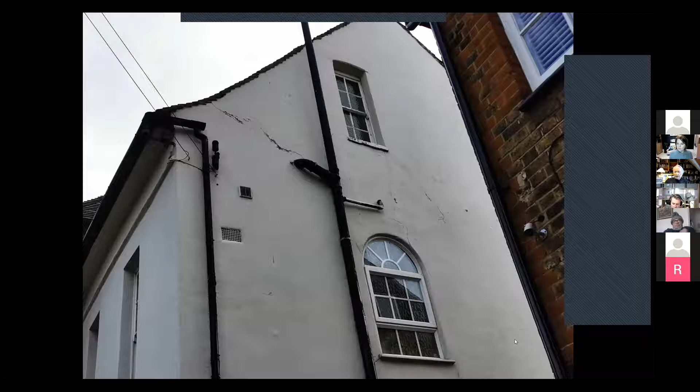But they're single instant failures. So before I start on that, let's go back to last time, because we looked at a building, if you remember last time, having worked our way through to it, and it was this one. Now, it's not often that you get the chance of seeing just how bad it is. There's the roof, that's the detail of what it was. And you can see over on the side here that the roof has slipped, tiles are missing, and so on. Okay, this is as it is now, or was a few weeks ago.

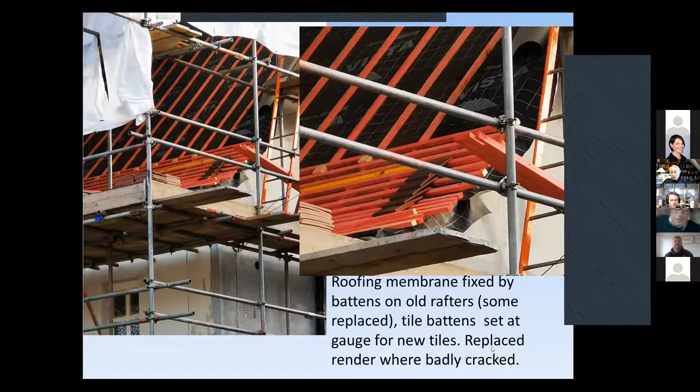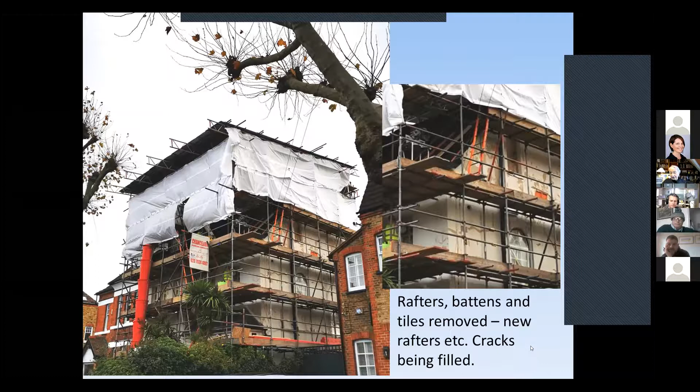So what has happened? When they pulled it to pieces, and now you can see the battens going on top of the felt, or the equivalent of, they've had to replace some of the rafters. They've had to strip the roof totally, and then bring back in those things which are going to be required for a new roof. So you've got a building which over here has got cracks in. They're all being filled. It's now totally re-rendered on that area, and you've got the work that's been done to the roof.

Anyway, back to today. There are two sets of things. Last time we started with the inspection, we worked our way through identifying what was the construction, its condition, from which we came out with what was the likely consequence, what was it likely to be that was wrong with the building. Today, we're going the other way around. What's wrong with the building is very obvious. From that, we've got to work back to the liability, the cause, and so on. So this time, we're going the other way around.

I set up this matrix last time, and we had a look at it. The failure, usually, you're trying to go down to consequences, maybe going up to see what the cause is. But let's just see what's been happening.

This is South Korea, Seoul. It's the biggest of the shopping centres, the Harrods of the area. It is incredibly posh shopping, or was. That is what happened: it collapsed, or half of the building collapsed, to be more precise. And within it is the Sampoong department store. You've got 502 people killed, nearly 1,000 people injured.

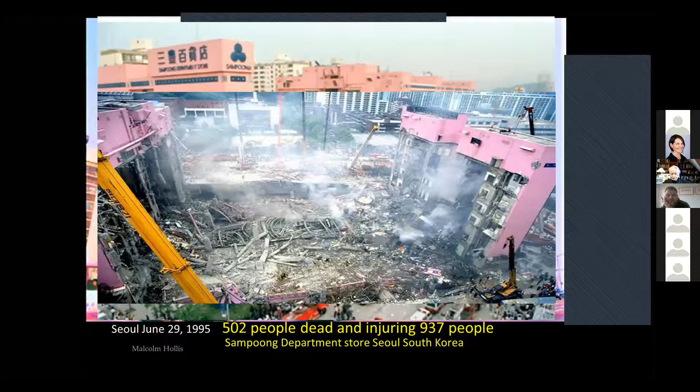Now, things like this don't just happen on a whim. There is a reason. And our job is to try and work back to identify that reason. So here we have some of the information that became available.

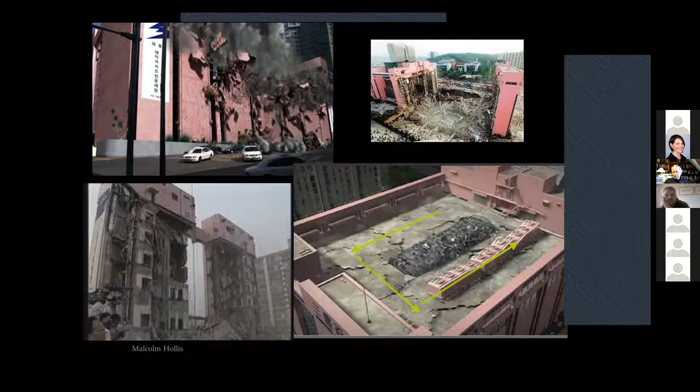Up in the top left, you can see the building disintegrating. Some of that's coming down on the outside, a lot of it drops straight the way through the inside. Down at the bottom right, you've got the air conditioning units on the roof, which have been moved. Each one of those units is 15 tons, so that's 45 tons of equipment on a roof, vibrating. So let's see.

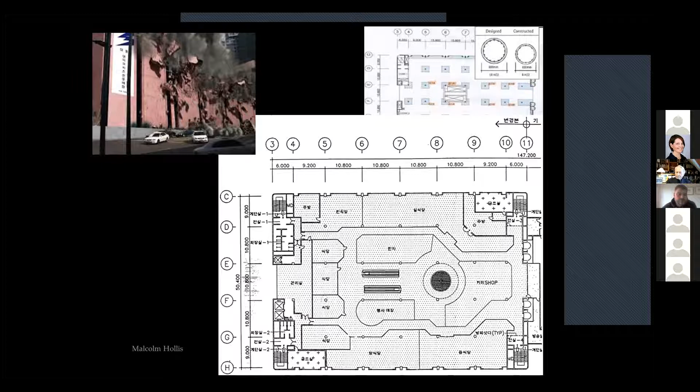In terms of the building as it was put up, the columns were undersized. That's the size they should have been, and what they turned out was that. So in terms of the inside, not only were the columns undersized, but also they took some of them out to get the escalators in. So you've got a building which now we know has been reduced in terms of its strength. It's been reduced in terms of the supports for that strength.

29th June 1995, 25 years ago, the roof gave way, the air conditioning units came through, columns fell, and it took 20 seconds, they reckon, from the beginning to the end. But that is, of course, rubbish. It wasn't 20 seconds, it was 2.5 years into this that you could have stopped anywhere through that, and people's lives would have been saved.

In the investigations, design errors were found. We've talked about some of those. There were many construction faults, poor construction quality, reduction in the cross-section, changes made when they added an extra floor, which was to be a roller skating rink, and was then changed to a restaurant. I had forgotten that eating in that part of the world, you tend to sit on the floor. So the floor became a heated floor so that the diners were not left in too much discomfort. And the heated floor is yet more weight. It was completed in 1989.

Again, you look at the building, you see the changes, you see the errors, you see the alterations. Now, none of those in themselves would have caused the building to fail. These buildings are built with something like a factor of safety of 2.5 times. So if you're reducing the quality of the construction, the strength, you're probably only reducing the ability of that building to withstand by 50%, 60%. It should still stand up. And of course it did.

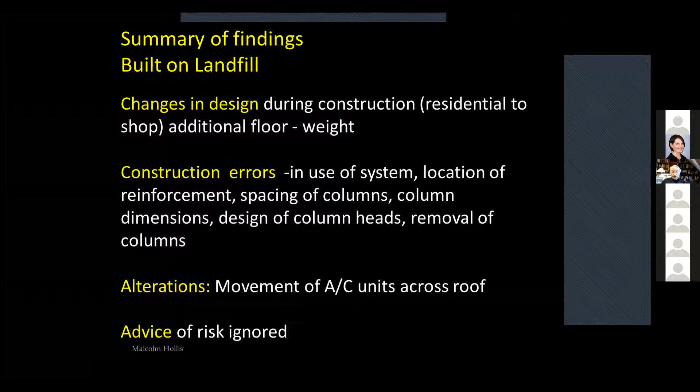So what we need to know is why it began to fail, and in that, what the warnings were. We have a change of use too. It was originally going to be put up as a residential building, but they changed it to a shop. The consequences of that, as I've already mentioned, is the columns being removed to get the escalators in, the columns which are undersized. We've got changes in the design with the weight of an extra floor. We've got also the heated concrete floor and overloading through that by 4 times.

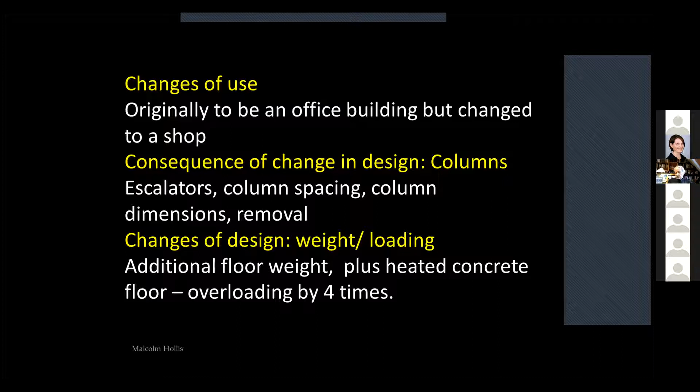Now that again doesn't mean that we've got the problems. What we do have is a flat roof construction, a flat slab construction. This is where your slab is reinforced concrete and it's supported on columns which we've already talked about. But it is vulnerable if you start getting weaknesses and failures to those columns punching through that roof construction. And over on the left, you can see one that didn't completely collapse, but where the top floor has actually dropped through those columns.

In this one, adding to the construction problems we already mentioned and the weaknesses which have been created, the steelwork which was put in had undersized reinforcement bars and not as many as there should have been. There should have been 16 and there are only 8, and their size was severely reduced. So we yet again have something which created problems.

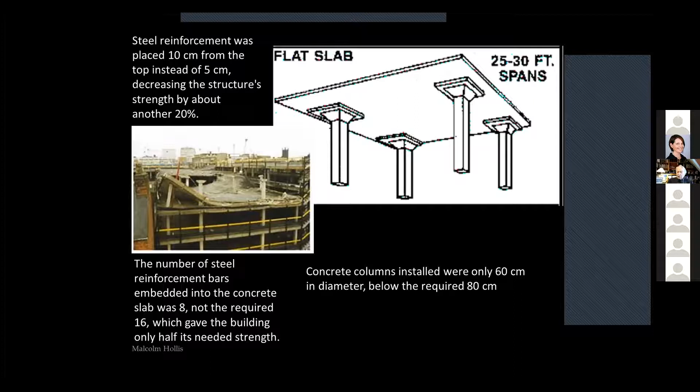And also the reinforcement bars were put in the wrong place. Instead of being something like 5 centimeters from the top, because obviously what you want to do is to stop it doing that, that's why they're there. You've got them lower down, which actually means it'd be pretty good to stop it doing that, but that's not the way the forces were going to act. Again, 20% reduction in the ability of that building to stand.

Oh, minor thing, they'd use seawater to mix the concrete. So this is a building which had a death knell to it anyway, because that would have deteriorated the reinforcement within it, so that it would have deteriorated over a period of time, but not the time from when it was built to when it collapsed. Something triggered it, something set up the problem. That's the factor of safety you start with, and that wasn't totally eliminated.

We've got defective and misuse of the slab construction. We've got the design being changed. We've got added loading without adjustment in the design. We've got 50 tons of air conditioning units in use and being moved. When they moved it, each of those units, they pushed them across the top roof of that part of the building, so you had a rolling weight of 50 tons moved across a roof, which is flat slab construction.

Here's going to be a commonality. The people who owned the building were told by the company building and doing the work that the design was unsafe. The owners of the building reacted to that. They sacked the builders and appointed their own contractors. It's amazing how common this is going to be, that you instantly get a pink slip.

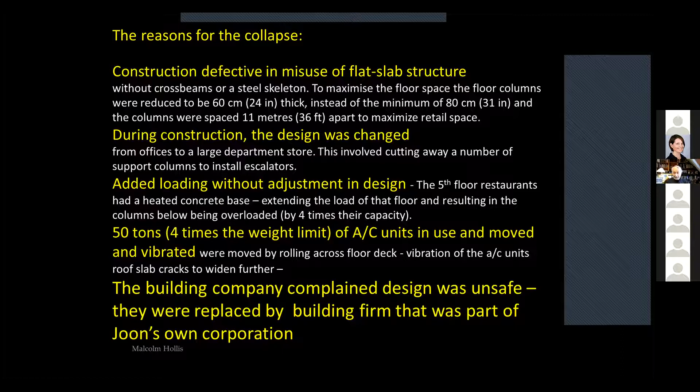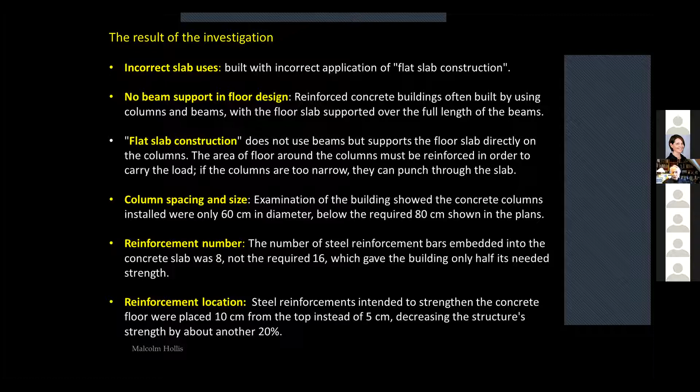The investigation was carried out, and it took 2 and a bit years. This identified the mistakes and the errors that we've talked about, and those are the ones which create the problem. The store opened in 1990. About 40,000 people were visiting each day.

They pinpointed eventually the trigger point. It was discovered 2 years before the collapse that the building's 3 rooftop air conditioning units had been moved. And it's not just the moving of it, it's the fact that they're vibrating. And the vibration is what sets up the beginnings of the cracking and its opening.

During the day of the collapse, it was fairly obvious something wasn't right. That was something which meant that the owners of the building, the owners of the shop, began to get people to move expensive items of merchandise out of the building. They began to get things which could be severely damaged and which were expensive removed—not their staff, not the people within the building. They didn't shut it, they didn't close it down.

But what they did do is they turned off the air conditioning. Now, in June in Seoul, it gets what I suppose I would regard as warm, and the temperature inside got to over 40 degrees centigrade, pretty close to over 100 degrees Fahrenheit. But they left the store open.

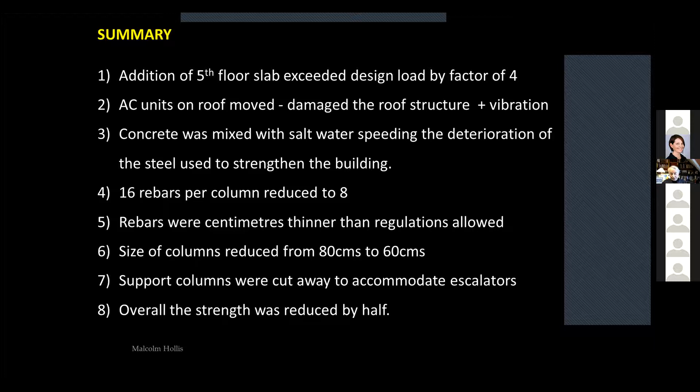The various people involved were charged with human ignorance, criminal negligence, and greed. They were found guilty. Lee Joon, who owned the building, got 10.5 years in prison. His son, who was the chief executive officer, got 7 years.

But buildings like this don't get up unless somebody has faked the details. Somebody has accepted something where they should have said, nope, this is not a good enough quality, this is not a good enough design. And one of the city officials, who was the chief administrator for the area, was sentenced to 3 years in jail for bribery.

He became sucked into the concealment of what was to be a major series of errors. The former chief in the area was found guilty of accepting a bribe of, well, it's about £10,000. He got 10 years—that's £1,000 a year.

So you're left here with the end product of fake information, warnings which have not been taken into account. You've got weak construction. You've got a building which collapsed because of the vibrations that were set up within it.

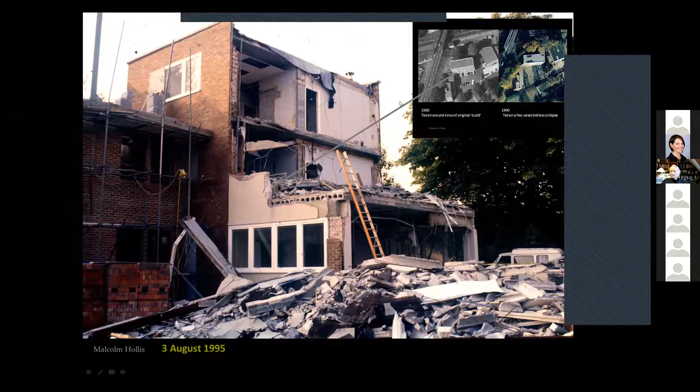It's missing here because it's been removed. It's there, but not there. You've got a brick pier with an external face to it, and the external face isn't tied into the inner. So whatever the dimensions of that column are going to be, they're not going to be the dimensions which are doing the job. And that is there, the aerial photograph, you can just about see.

Going in a bit closer, you can see how the windows have been ripped off. Sitting in a pier here, which is 1.5 bricks wide. Now I'm going to use the old dimensions, that's 13.5 inches. Those should have been 18. In other words, the outer face should have been doing a job. It isn't. So we've got a building which is under strength.

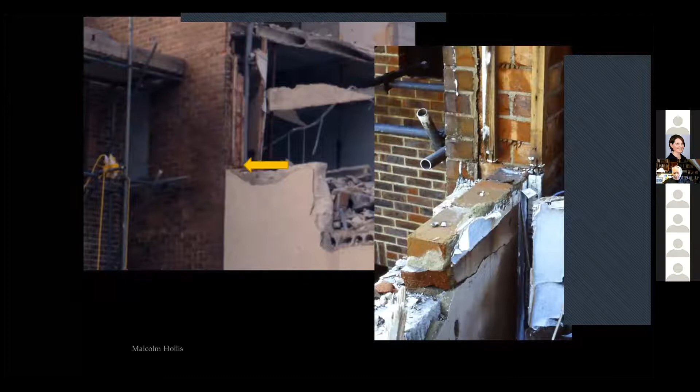We've also got some steelwork sitting in there, which, looking at the construction around it, doesn't leave you very confident. The rainwater downpipe at that location as well. But that doesn't look like neat, tidy brickwork to me. It looks like a cobble. Here's the remains of one of the concrete planks going right the way across, sitting on the steel, as you would expect.

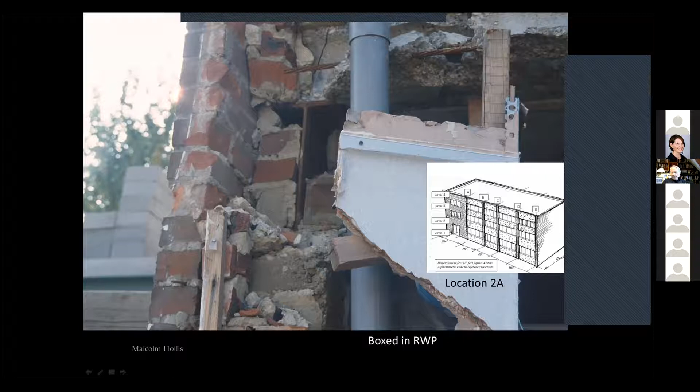So, using one of my sketches here, I had set up a matrix at the time I was first there, labeling the floors in numbers and the columns as letters, so that I could indicate or pinpoint where certain things were.

Here, as you can see in greater detail, how the outside of the pier has just peeled off. Detail here, it's a steel beam, I'll get you closer. There's the steel beam just about visible at the bottom. And I also checked whether these were vertical, how much they're out of alignment. They seem pretty good. Up at the top there, you can see that the bubble on that spirit level is pretty well in the middle.

So as you're wandering around now, you're collecting information, you're looking, you're trying to record as much as you can, because it's the first opportunity that anybody has had to go into the building and do this sort of work. I didn't go up to the second floor because all of that area, which is the kitchen, toilets, and so on, was too dangerous. The first floor wasn't exactly one I was happy about, but it was in a better condition than the top floor.

And then there's this. What do you see? Why is that dirty at that point? Let's go a bit closer. You can see the surface marks there. What's been going on in sufficient time for that to happen? In other words, that's not since the building fell down. There you're looking at something that has been probably days, weeks, months, certainly weeks. And there's obviously a staining.

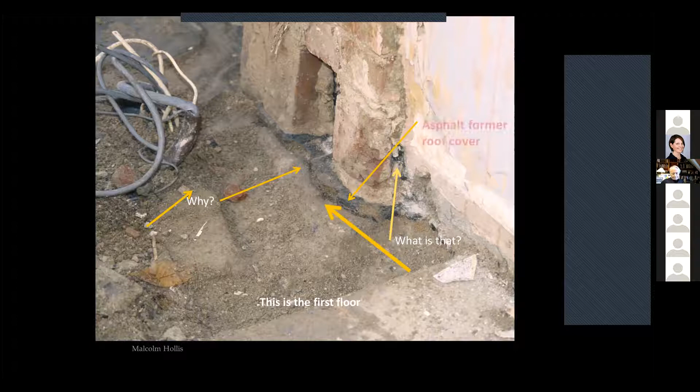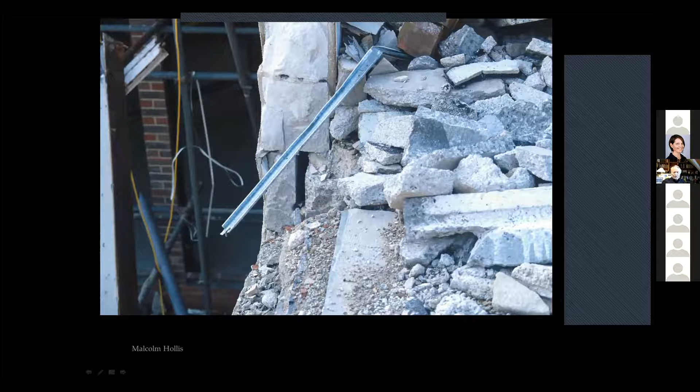And then you look at the material which is there, you're looking at the quality of the bricks, you're looking at how these relationships work down here, the remains of the concrete planks. And oddly enough, you get damp-proof courses where you don't expect them to be. You get down here holes right the way through the piers, ones for the heating system to go through, undermining or reducing the quality.

You measure the piers. That one you can see is 13.5 by 13.5, not 18 by 18 as it should have been. And again, the brickwork, you usually expect piers to be neatly tied together with the bricks being laid in a way that you can see they're forming a solid mass. These were just thrown in.

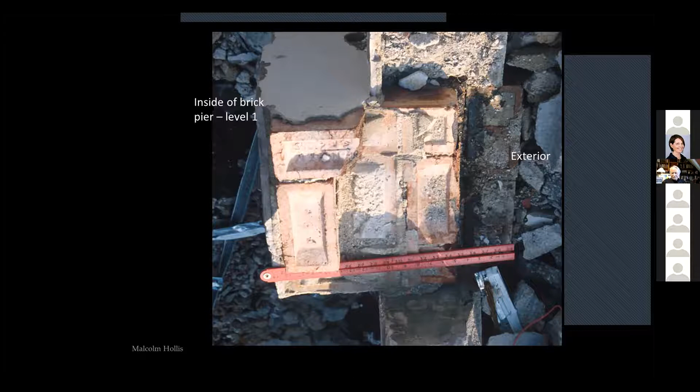More pipes running through. And this time, what have we got? Just about 9 inches by 13.5. And that is where the outside leaf was put on top of it, but not fixed.

So going back to one of my doodles, you've got bricks in a higgledy-piggledy way, not forming a uniform whole, and that is an example of a pier that is there within the building.

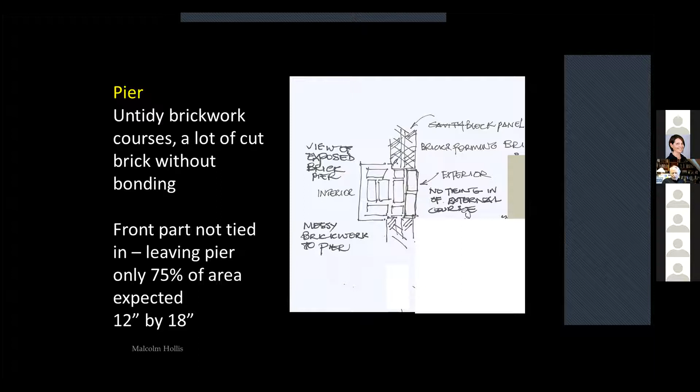The front part not tied in, the untidy brickwork - you have a building that you regard as being weak. But then you're looking at this from it being exposed. You're not looking at this on the basis of what you'd see before anything fell down.

So each bay has got brickwork, has got the 3 levels. We've got the concrete beams that go across these planks. We've got infill panels at each level, which are block work, which has been rendered.

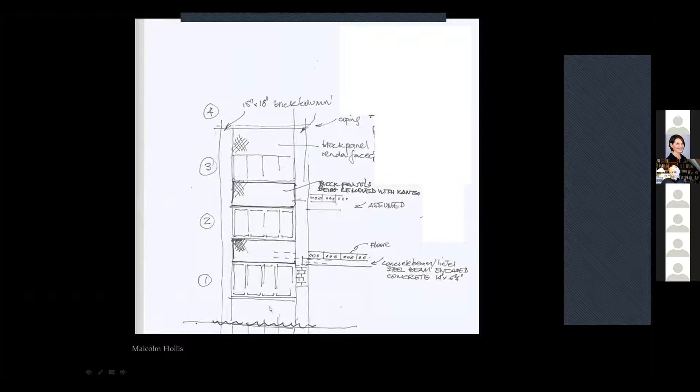All of those become relevant as we go further on. But all we're doing at this stage is trying desperately to collect information because it won't be there in the long term. Somebody's going to go in there and start tidying up, and at that stage, all of this is going to be missing.

So the whole of what I was doing was making sure I had drawings, sketches, notes, measurements, just so that I had a record. From that, I wanted to get some idea of how it was built and, putting it bluntly, what it looked like.

And we've got choices. We start off with a static analysis. Let's review the evidence that comes from drawings, reports, witness statements, and aerial photographs. Let's then, from that, recommend the deconstruction of the remains so we can test materials, look at how it is actually constructed. And then we want to try and verify what we believe is our theories.

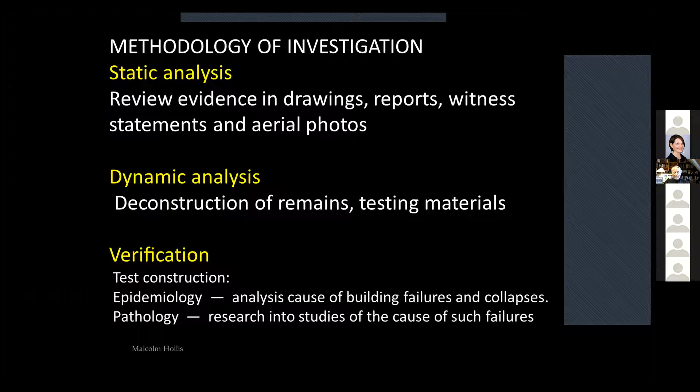And usually we're using pathology or epidemiology. And now analysing the cause of the building failures and collapses, we're researching into the studies of the cause of such failures. And we've particularly come across this again because these 3 subjects are all interrelated.

Now, preliminary inspection identifies what has been disturbed, where the bodies probably were, but we keep an open mind. When it comes to the investigation stage, we're going to try and recreate the appearance and construction of the building prior to the collapse, so we know how much it's been changed.

We have got information that will come from aerial photographs, the press images we've already seen, but we're going to look at the drawings that were available at the time of the collapse. We want witness statements, the people who were there at the time. We want to know what they saw, what they were doing, what was happening.

The pathology reports, or the pathologist's report, will report on the bodies, so that one can work out where people were and a lot of other things which we'll come to. And again, trying to establish what the construction was and any issues of stability.

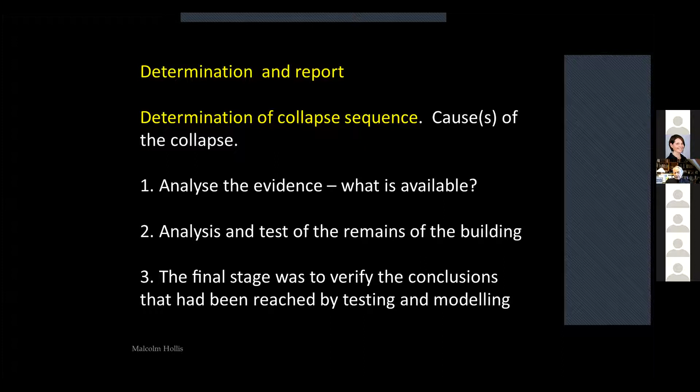I've got to report to clients. I can do an interim report, I can come up with theories, but what we need is more information and evidence. So we're going to analyse that, we're going to look at the remains of the building, and the final stage will be to try and verify our conclusions.

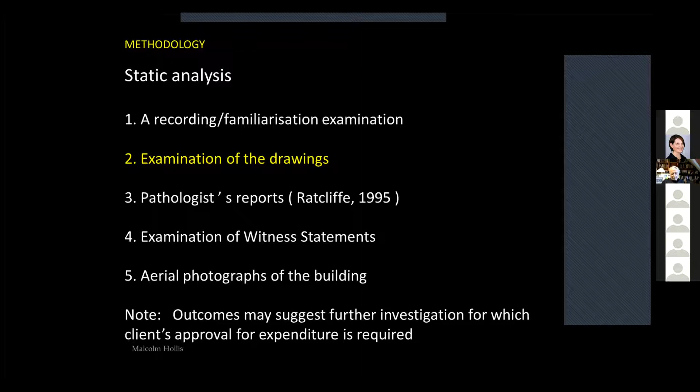So we've done a first look, and we've recorded as much as we can. Now it's the examination of the drawings, from which we hope we can answer the questions: what was the building like before the collapse?

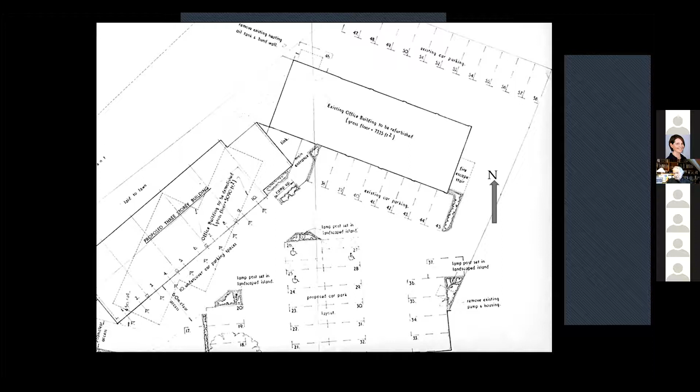So let's look at what we've got further.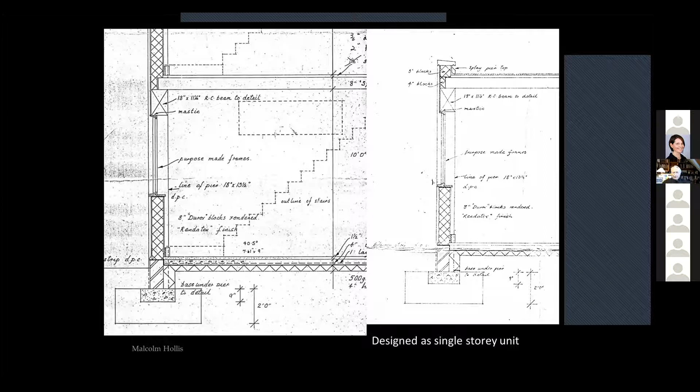Here's the floor plan. Down the left-hand side, these are simply the notes on the drawing because they're pretty difficult to read. Forget what's down on the side of the plan and look at what's written there. What we've got is the dimensions of the blockwork, brickwork, and the cavity in the construction, and the dimensions of the piers that should be there.

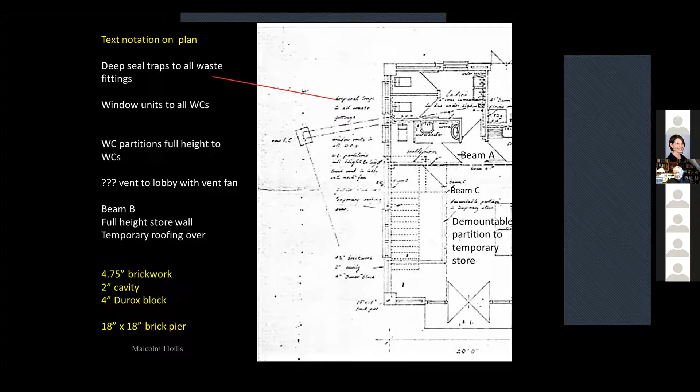We've got floor plans drawn at a different time, totally different hand, different lettering, different clarity. Here we see something relevant: a foundation marked out, and here a steel column, a steel pier. So we're looking at somebody having identified that this building is not strong enough as it sits there. It needs strengthening by the addition of additional steel columns.

To fit those in, they're going to have to chase their way through the existing construction so that you can get those columns in, and down at the bottom you need some space so that you can dig out the foundations. Somebody has decided the building is not strong enough as it was, prior to the building work. Crudely, I've sketched out there what is taking place. Probably, and almost certainly, I've made the holes in the individual panels too big.

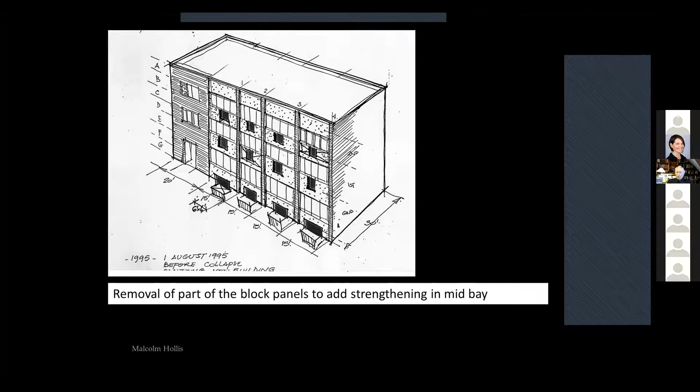That had been cut away before the building collapsed, as had some of the others. So we've got that marking that we were looking at before, indicating that this was probably the size of the chase, directly above the middle transom of the window. Concrete planks that we've seen before - we're looking at that being where the column was going to go up.

So we've got non-reliability in the drawings. One lot's showing something, another lot showing something else. They're showing the building has been altered after part of it was completed. So we now know, if these are right, that we're looking at extra loading being placed upon the building. We're talking about the changes from the final build.

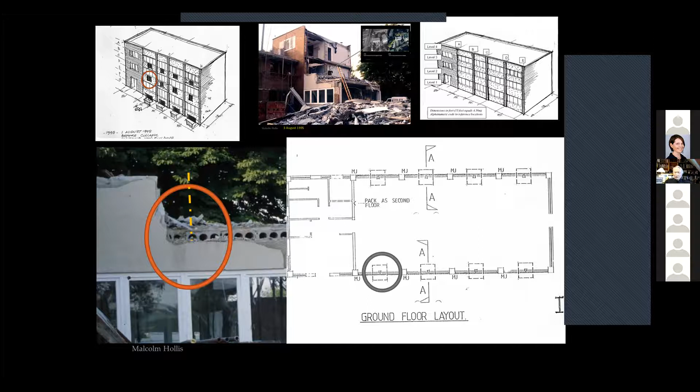In those changes, there are some other things. If we go back to what was supposed to be there, this should be a reinforced concrete ring, going around the building, acting as lintels right the way around and tying it all together nice and neatly. Whereas what we saw when we started looking in more detail, they have done individual steel lintels, I suppose, as beams across each opening, untied together, so that there is no continuity.

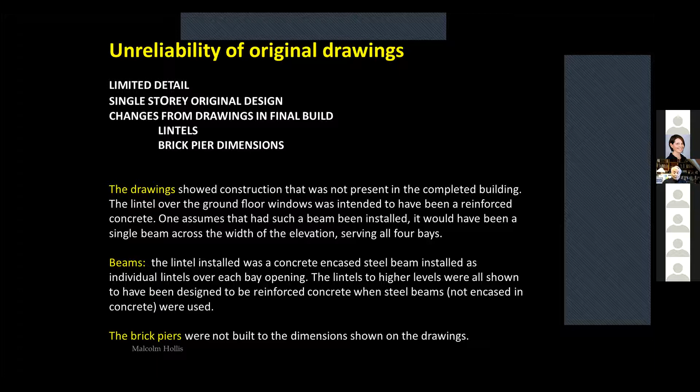If one of those piers begins to distort or fail, it's going to take with it the lintel, as opposed to what would normally happen. If you've got the ring beam, it could move away and not severely damage the construction that was there, because there'd be that extra support that would come from it.

So we've got the examination of the drawings, and we've got some wobbles in our mind as we think about it. Now let's look at Dr. Ratcliffe's pathologist's report. He looks at more things than you'd expect. Not only is he looking at the bodies and what caused the problems and so on, he also notes things like what they were wearing - no hard hats, no protective clothing or protective footwear.

He also looks at the alcohol levels. This collapse took place just after lunch, and the blood alcohol levels are obviously relevant because somebody who's working with heavy equipment and they were cutting away those brick panels, block panels, to get those new steel vertical columns in - well, if you've had a drink at lunchtime, how accurate is your use of a Kango? Mine would be pretty crap even without the alcohol. Might be better with it.

But what you've got is a percussion instrument which is doing a vibration job, and it's cutting into the building, and you need it to be done accurately. Careless use of that could have set up the problems. He also listed the names and occupations of those who died: the site manager, contractor, carpenter, and labourer.

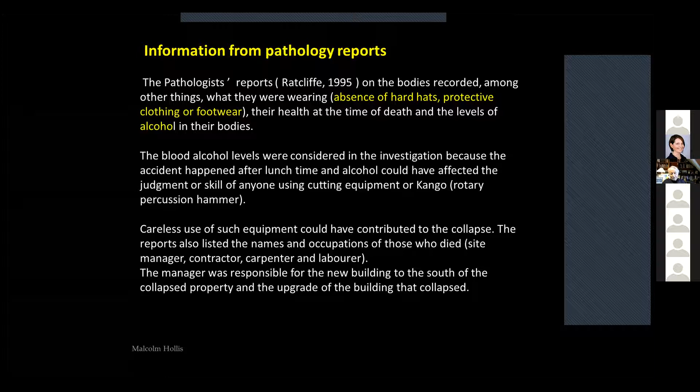So the pathologist report has told us something. It's going to help us know where the bodies were. Now let's look at the witness statements. This is where we're going to try and get some information from those who were there on the site. There are about 23 people working on the site, so there's 19 people who should be able to tell you what happened.

And this is what you get: the suggestion that the building was distorted before the collapse took place. Many of the statements referred to the piers on the front elevation being distorted and leaning out, leading most of the witnesses to conclude that the building had been built out of plumb.

Column C2, which is the one I've pointed to, was kinked in and out and was not straight. 5 inches in and out, or 2 or 3 inches one side, 1.5 inches another, irregular in another. Quite a bit of distortion is another piece of evidence. The building is all over the place, 2 to 5, 2.5 to 3 inches out of plumb.

Building not plumb, cracks inside at bottom of piers. Piers C2 undulating towards building. The examination of the remainder of the building, however, did not support all of these statements.

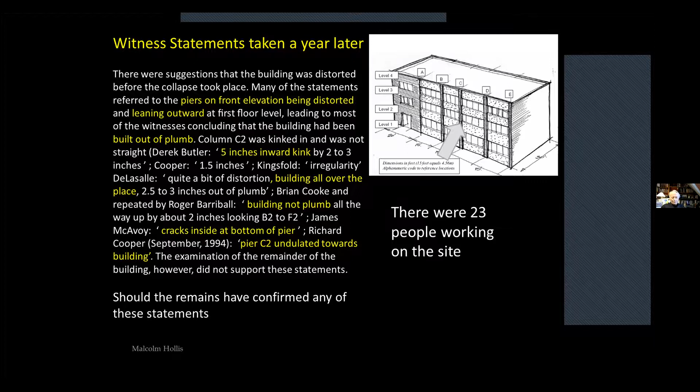And in fact, now there is actually guidance to that very effect. The information about the work in progress at the time of the collapse is relevant. Panels were being cut on the first floor near the middle - well, in fact, they were being cut roughly where I've put the arrows in. Based on the information, it was between A2 and B2, which is actually further over this way, or C and D.

There's reference to the use of a Kango hammer to remove the blockwork underneath the windows to put the new steel columns in. But it was silent before the building collapsed. Whatever they'd done, whatever they'd started off, did not cause the building to fall down. What it did, well, is expose the most likely causes.

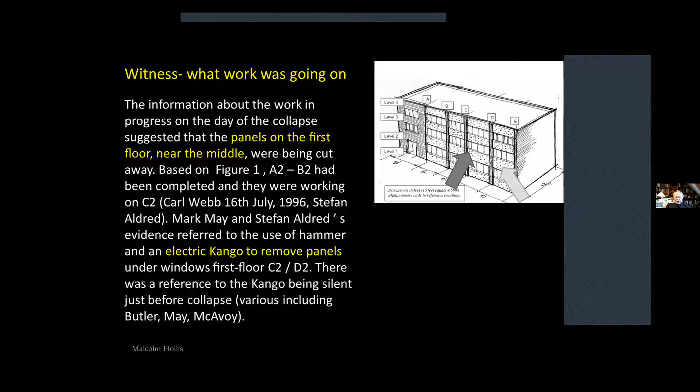Where were the bodies? Taken from the pathologist's report, witness statements, and all of the others, the bodies - well, 3 of them - are where those arrows show. One body was right over here, nothing to do with what was going on here. But 3 of them were right on top of each other.

The site manager's body was found at the bottom of C2D2. One of the others was nearer the center, and they were recovered from the ground floor. Part of one of them was on the first floor.

Going back to evaluation of witness statements, we've already decided that they're not really independent. The nature of them suggests that they corroborated. And the guidance noted in taking witness statements records that witness statements should normally be taken as soon as possible to ensure that the events are still fresh in the mind of the witness, and the evidence is recorded before the witness has the opportunity to discuss their evidence with others. That's from the guidance that is issued and is common and applied in all cases.

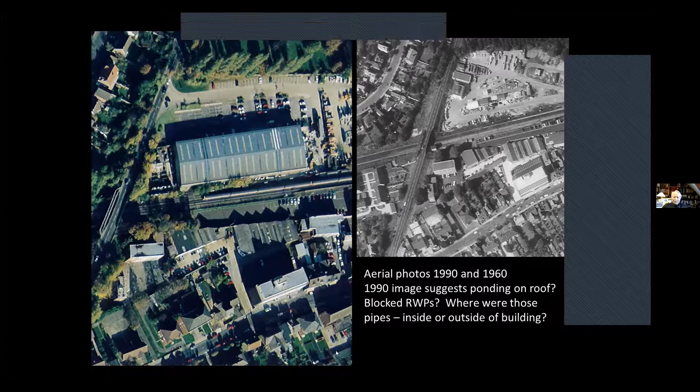This right-hand one, the black and white, was taken about 1960. The one on the left, let's get a bit closer. The one now on the right, 1990, we can see that something hasn't been maintained very well. We've got ponding on the roof where rainwater downpipes have probably got blocked. We've got something which has got an additional line of issues, which we've got to think about.

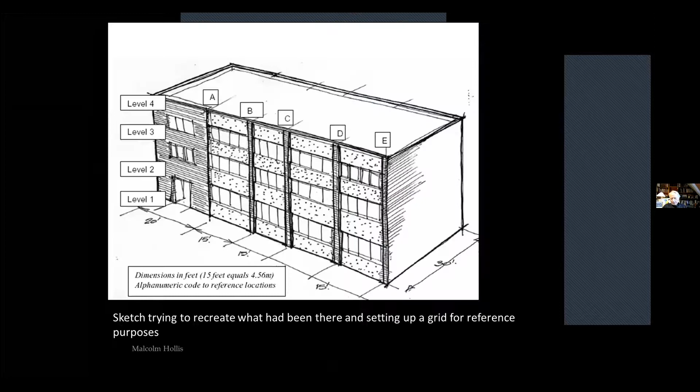And then you come down to what it is that you're going to recommend. We've so far done the first part: an initial inspection. We've done an inspection of the original construction drawings, aerial photographs, pathologist report, and witness statements. And now we come to the biggie.

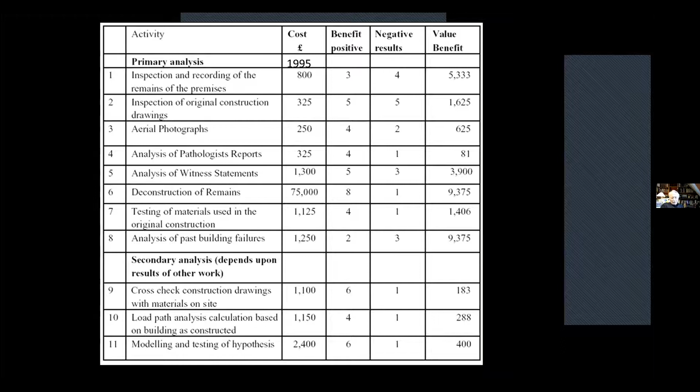And you might want to do an analysis of past building failures of this type, except in this country this is a rarity. Then we will work on other things, which is modeling and so on, to test the hypothesis.

So we come to the deconstruction. We've got the dynamic analysis, we've got verification, and we've got determination of the cause of the collapse, the sequence of the collapse, and the liability.

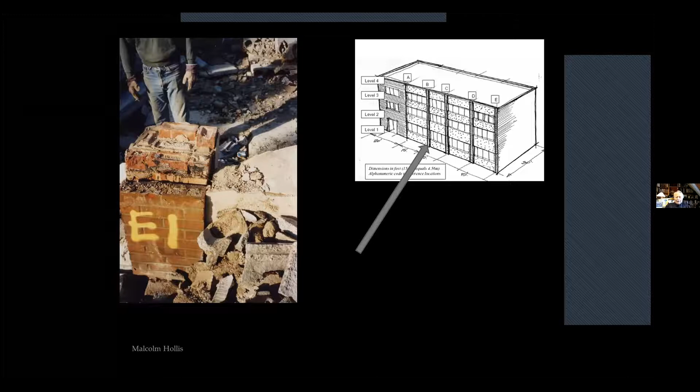So here we've got the piers being marked off. What I labelled originally as A, B, C, D, E have now been slightly changed because the matrix that's been used starts at the very rear corner of the part that didn't fall down. All of the areas begin to be marked off, but you can see that all the debris has now been removed.

And what now becomes unearthed is something like that. The drain's directly under one of those brick piers. So you're looking at something where over in the corner here, you've got a blocked rainwater pipe - how on earth you can put a pier on top of the drain, I don't know, and I probably never will.

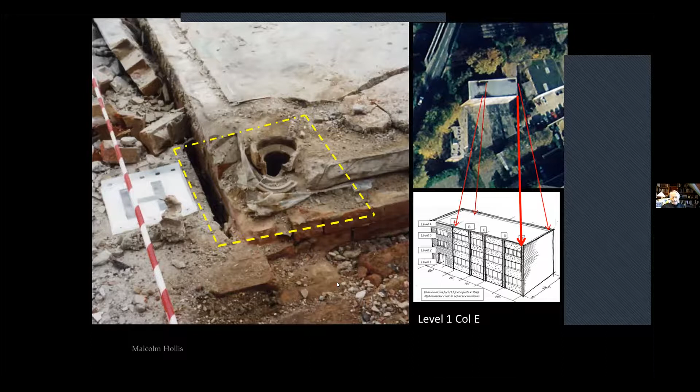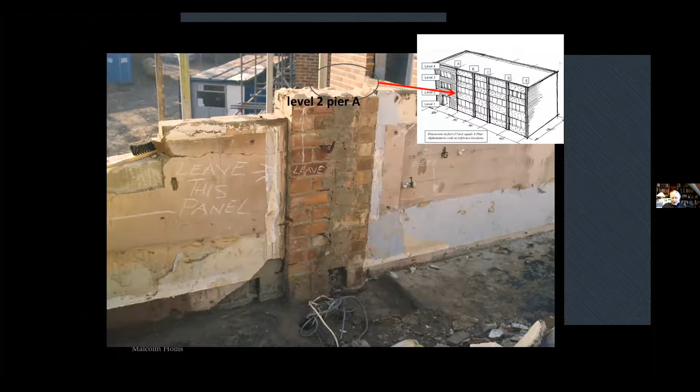And then you look at the deconstruction of the piers. What we've got left, we want to look at and examine. We want to be able to find out what was going on. So we got back to that asphalt where we know this pier has been built on top of the original roof.

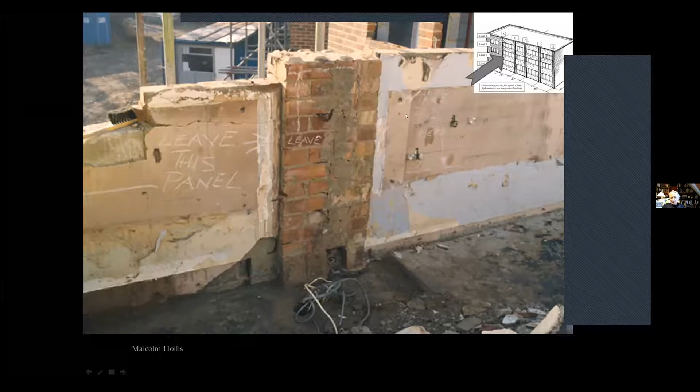So where we are looking is over here - that's where we are at this point. And then you start looking into details. Some of the brickwork gets taken off the outside, and you find a damp-proof course flashing there, laid into the brick courses. That's because that used to be the roof - you wouldn't expect that at each level normally. It is something which goes back to confirm that this part is the fill where on top of that the asphalt lay.

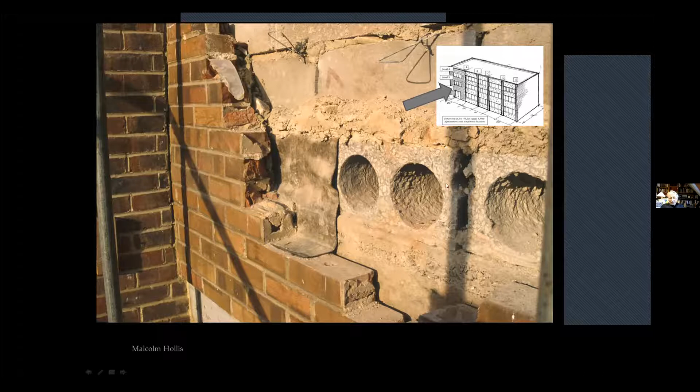The concrete beams, as we've seen before, the planks are all in the place you'd expect them to be. So gradually now, we're going to take block by block out to see what is there.

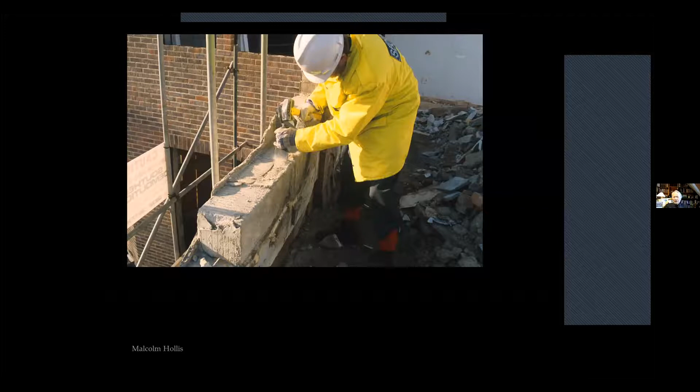That's the detail over in that corner. Brickwork on top of the blockwork there. Here we've got one of the concrete lintels, and that was another one. Separation between the two, so there's no continuity.

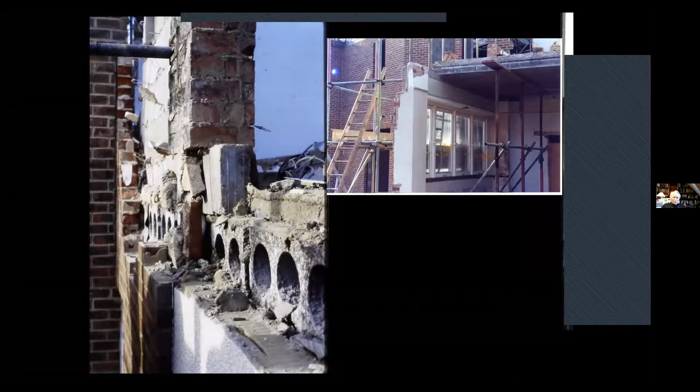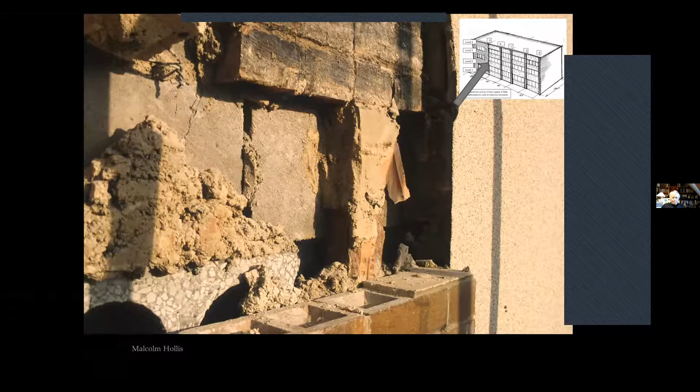And we've got our - hang on, what are we looking at? What is it that's going on here? You've got the pier placed on top of what was the parapet wall and blockwork, and it's balanced - balanced with just that support on the outside, balanced with just those bricks on the inside, and it's sitting on a lightweight concrete block.

So the floors that have been added above for the construction, and the weight of those floors and the weight of the roof, is sitting in that particular place where you've got the brick pier directly on top of a block.

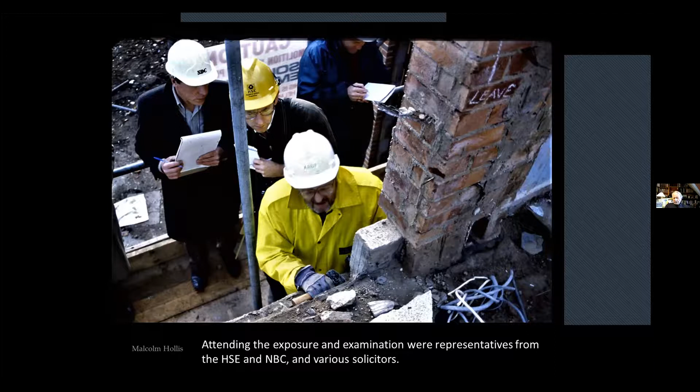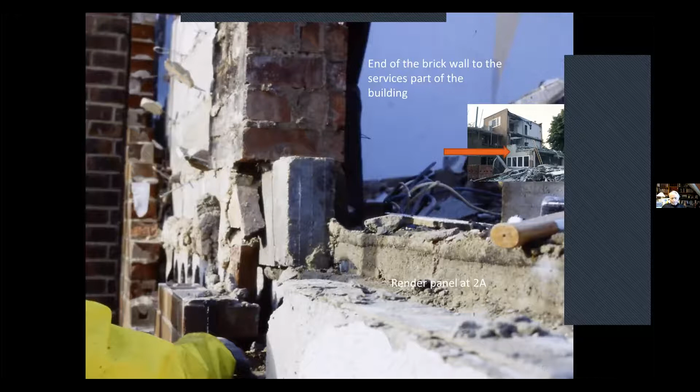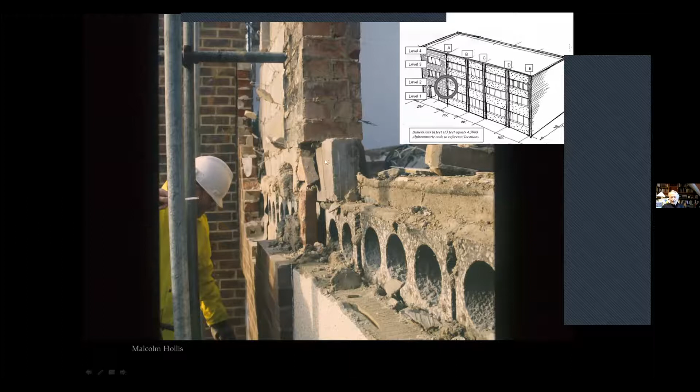It isn't as if these bricks that were propped up were even linked to or tied back onto the surface. They were just filling in a gap rather than adding support.

On the other side of the building, at the back, you've got the same sort of thing going on. That plinth was the original, and you see the asphalt behind there, that was where the roof was dressed up. Parapet with the coping on top, that is what that edge was.

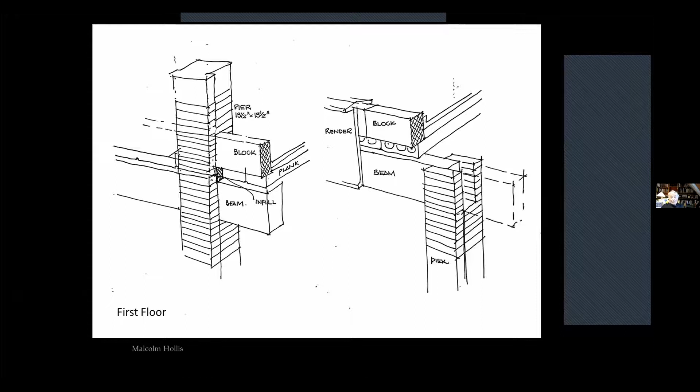My doodles again, my sketches, show you what you're looking at. It looks a lot better in the drawings than it actually was when you're standing on the site and first see this. You think, how on earth can anyone do that?

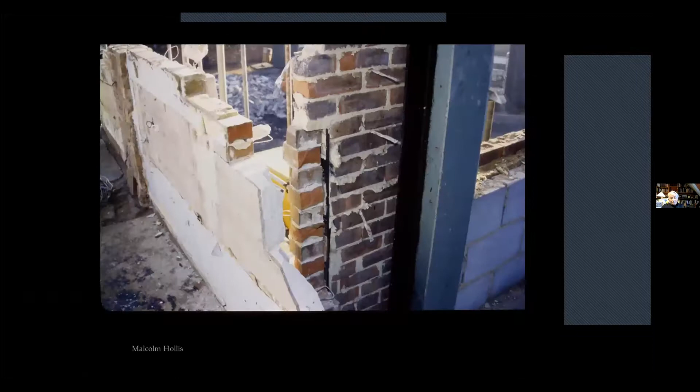But you've got 4 people's deaths on your hands. It was constructed as a single-story building in 1969. It's had 2 floors added, put up before health and safety issues.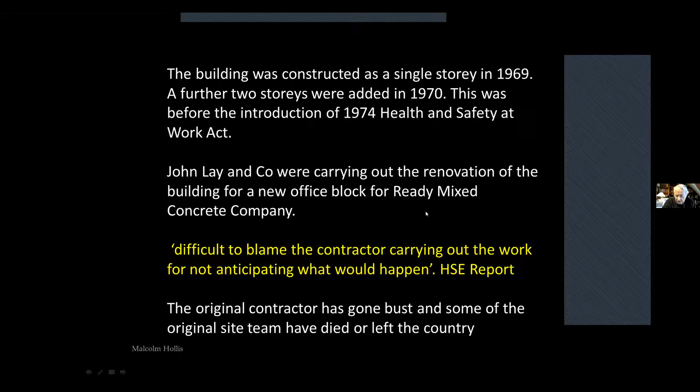The contractors carrying out the alterations were held to be difficult to blame for not anticipating what would happen.

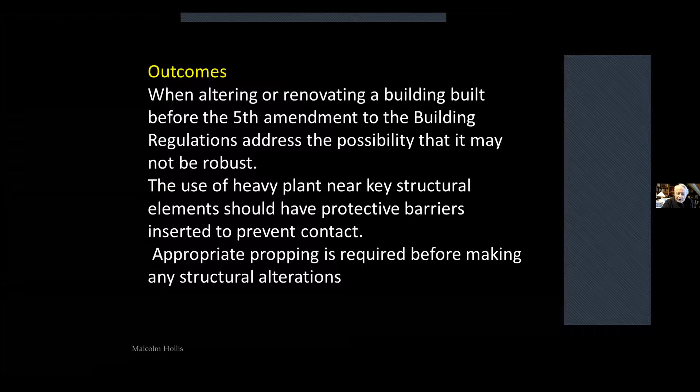Let's just look at what they could have found, because all of these things we know about. When you alter an old building, built before the 5th Amendment, you know that it may not be as robust as you would like. Use of heavy plant near key structural elements is a risk, a concern.

These are all of the pieces of legislation which relate to this type of work.

And when it comes to the contractors having no liability, well, let's just look. There's a lack of a risk assessment being carried out, a lack of a preliminary structural survey, poor planning of demolition, absence of temporary structures to support.

I couldn't believe there wasn't a single piece of scaffold in amongst the debris. There's a lack of demolition method statements, lack of supervision, lack of protective clothing, a failure to identify the existing construction, and failure to consider the adequacy of the dimensions of those parts of the building.

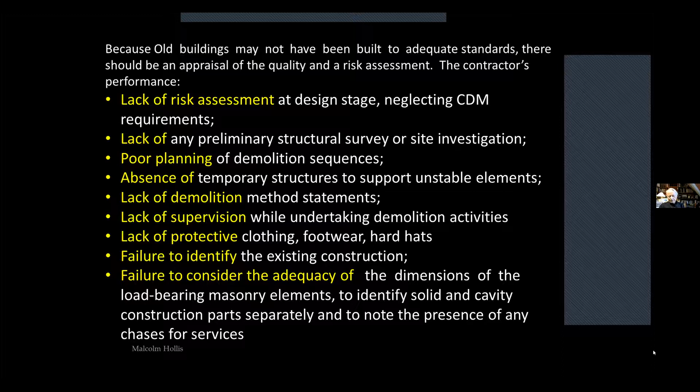Those are things that should have been done better, and had they been done better, this would almost certainly not have resulted in the deaths of all of these people.

After 4 years of investigation, no one has been brought to book for what remains one of the single worst construction accidents to have taken place.

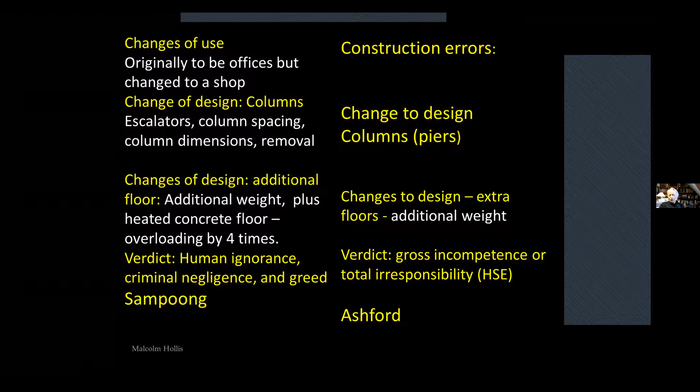And suddenly you compare the two. So, here in Ashford, construction errors, changes to the design, changes to the design adding extra weight, and a verdict of gross incompetence or total irresponsibility. That's the Health and Safety Executive getting it right in the end, reporting upon the original builder, not on the ones doing the work.

Those who died, taking away life through errors of people's judgment. In amongst the rubble there were so many things you came across, like the hat I started with, like this coffee cup.

No one was held liable. No one was fined. No one went to prison.

Now we come closer to today. The cladding was added to Grenfell Tower in 2015-16.

Celotex was the main material used, although Kingspan was also used in some places. That insulation was placed behind an aluminium sheet and set off the wall, leaving an air gap at the back.

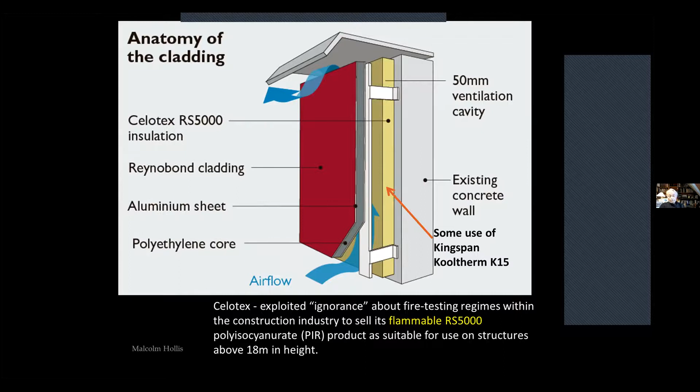They launched Celotex, the product, PIR rigid board insulation, which is now going to be referred to as RS5000. I'll just turn that off for a moment.

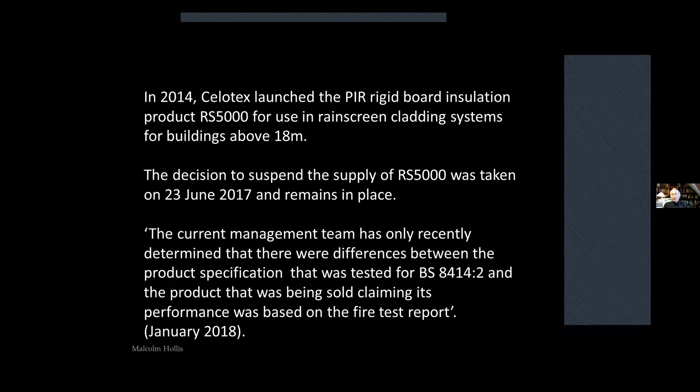And they maintained it was suitable for use on buildings over 18 metres. They stopped the supply of this in June 2017, immediately after the fire.

Celotex head office have made very damning comments of their own workforce in relation to this. The workforce maintained that it was only recently determined there was a difference between the product specification that was tested and the product that was being sold.

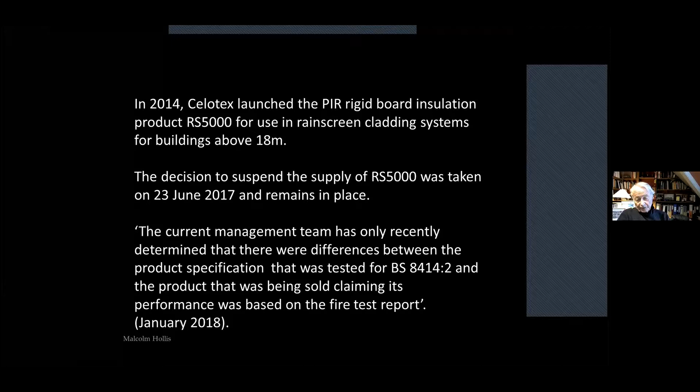The one they got through the test was a totally different product. You've got different materials on it, a different outside face and a different composition.

They tested that material in 2017, just after the failure of the building and the sadness of the loss of lives. They found that in the test, flames quickly damaged the aluminium panels, taking hold and moving from floor to floor. Burning drops of melted plastic fell like rain to create a pool of fire below.

They had to abandon the test to put it out, because so great was the burning.

Celotex sent a sample. We're surprised when we learned in August that while this sample continues to meet the standards for class 1, it did not achieve a class A rating. They shouldn't have been surprised - they knew that they'd changed the specification.

Let's talk about Kingspan, who didn't provide much insulation for this product, but did produce some for this building. They amended the materials, got ratings for a material that was not the one being used, and then used that rating to promote and publish the material that was actually used on this building.

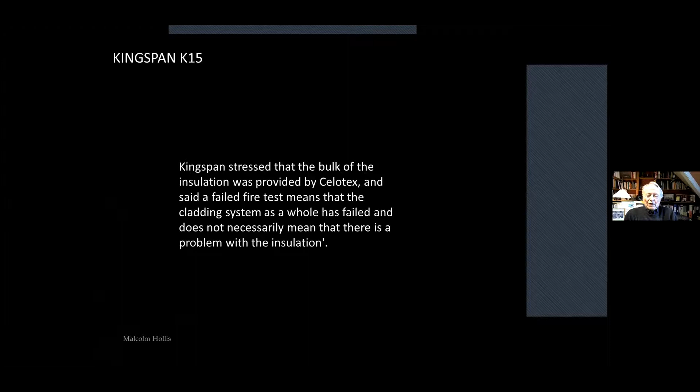Kingspan stressed that the bulk of the insulation was not them. They said it failed the test because it was only part of the insulation - it was clad by something else. But it was the whole system that should be identified.

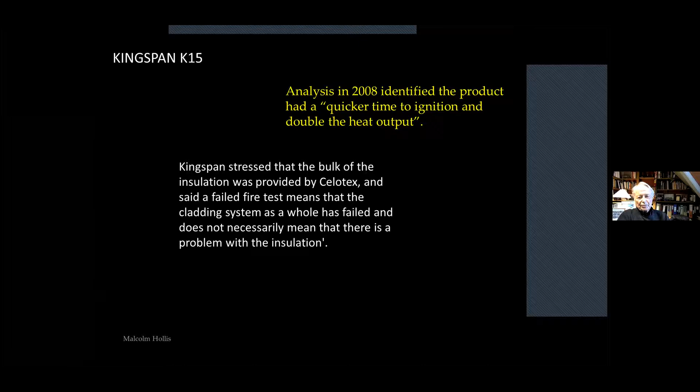The analysis in 2008 identified that the product had a quicker time to ignition and double heat output. 2008 - that's nine years before the fire. It burnt very ferociously and gave the top cavity barrier a serious hammering.

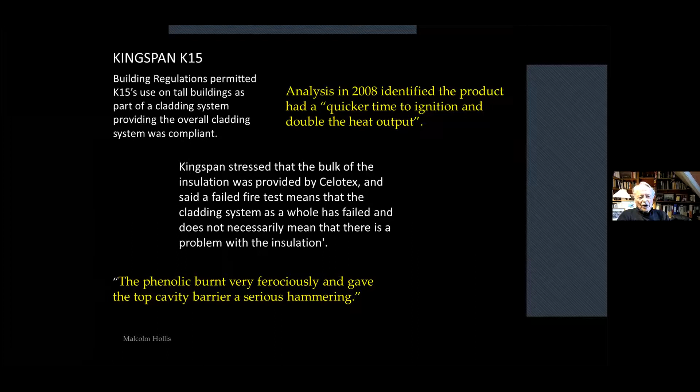The building regulations permitted the use of this material as part of a cladding system, provided the overall cladding system was compliant. It wasn't. A senior Kingspan employee, when a builder questioned the fire safety of this product before the fire, before the problems, whilst they were looking at choosing whether to go up, said something you can read for yourself.

Everyone was blaming everyone else, but the fire tests carried out were not representative. The materials that had been tested and got performance ratings were not the ones being used. It is fraud. It is deliberate misleading. The cladding was the primary cause of the fire's spread.

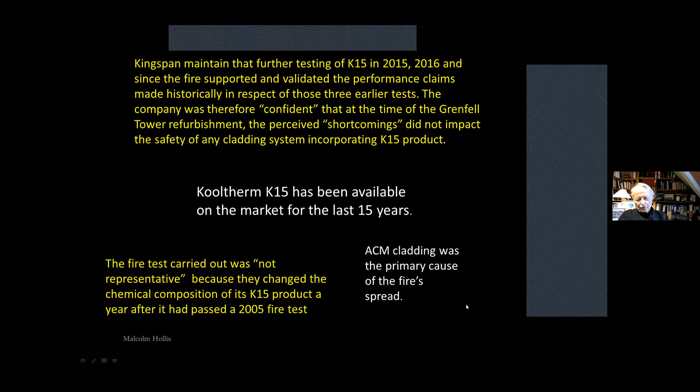So to conclude, it was avoidable. It should have been avoided. People have been, I think, guilty of manslaughter, criminal deception, fraud, negligence - and they are guilty of that in what is now written.

So will they be sent to jail, as we saw in Sampoong? Will they be fined heavily? What is going to happen? In each of these cases, we're looking at things which should have been avoided, which could have been avoided, and yet people failed to take notice.

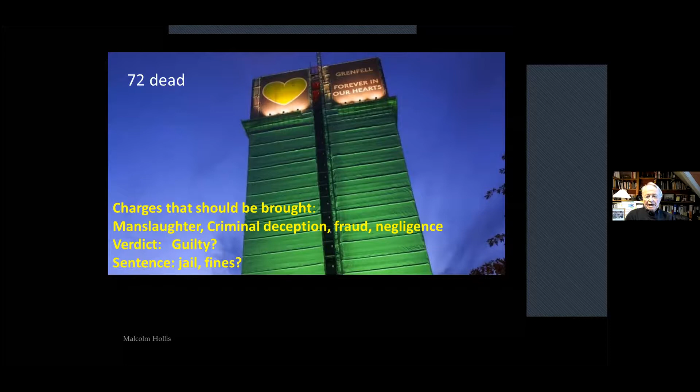There we go, I'm on mute. Thank you for that, Malcolm. Boy, that is sobering stuff, isn't it? Thank you so much for taking the time to put that together. Any questions from anybody? We've had a few comments in the chat, but I think the overall view would be shock, actually, in terms of how people are feeling about it. But any questions or observations anybody wants to make?

Yeah, Claire says it's shocking - when you get this insight, you understand how these things have started to happen. You think, how could it be? Atul asks, should we abandon the value engineering approach from construction, because Grenfell was value engineered? What are your thoughts on that, Malcolm or Phil?